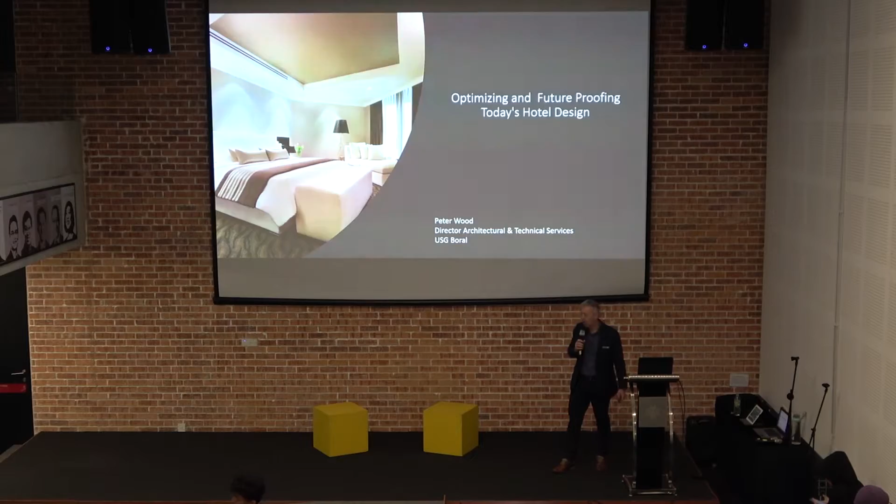So the talk we're going to give today is just on hotels, and we've been doing a lot of work in the region over the last couple of years in hotel design in Southeast Asia. There's been a massive spike in the number of 4- and 5-star hotels being constructed, and we particularly see that around Vietnam, Indonesia and Malaysia as well. And with that, it's becoming more and more of a requirement for our customers and guests to have a good experience.

So everyone these days has a smartphone. Everyone is a critic and everyone is a reviewer. And I know myself personally, when I'm looking at a hotel or where I'm going to go on holiday, the first thing I check and my wife checks is the star ratings and the reviews in TripAdvisor and Booking.com. So the guest experience is probably even more important these days than it has been in the past.

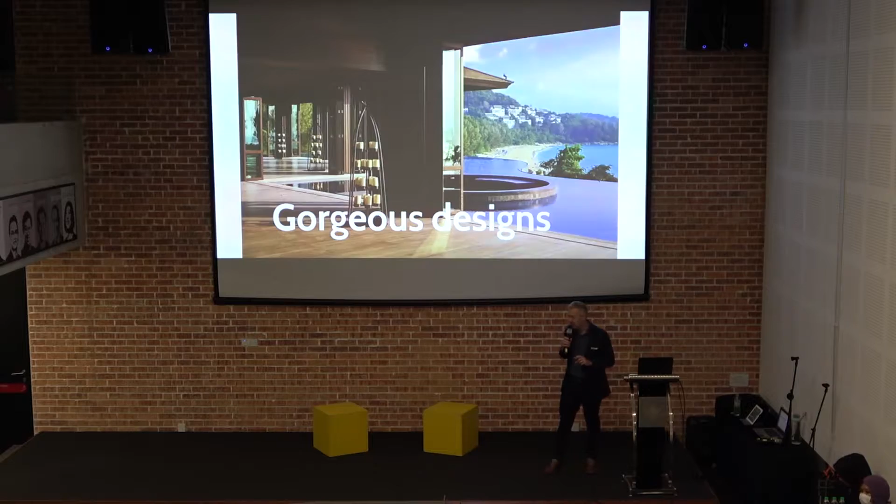So there's a lot of attention from an interior design and architectural point, getting the finishes, the look and the experience of these hotels to be perfect. So beautiful rooms, a lot of time spent on material selections, color palettes, the overall experience and the look. But sometimes we do see, when we work on these projects, something being missed. And if we look at social media, what we quite often see is complaints about the acoustics, hearing through the walls, hearing people in the rooms next door, the soundproofing not being designed that well.

And also even getting into connectivity these days, so Wi-Fi, poor connection. So what we're going to talk through is how do we improve, or what are the different ways to look at acoustics? There's thermal, there is Wi-Fi propagation, which is becoming a big thing these days, especially with internet speeds increasing, and productivity and the speed of construction. So those are the topics I'm going to cover.

So when we talk about acoustics, we're talking about sound. There's all different types of sound and acoustics. We've got external sounds: traffic, aircraft, people's general activities. Actually, just last week we had a trip to India for a couple of big projects there, and the hotel I was staying in was a 5-star hotel in Delhi. I don't know who's been to India, but they love their horns while they're driving, and there was so much road noise coming in through the windows and the external facade of that hotel. So external noise can be a big factor, but also the internal noise within that space, people doing different activities.

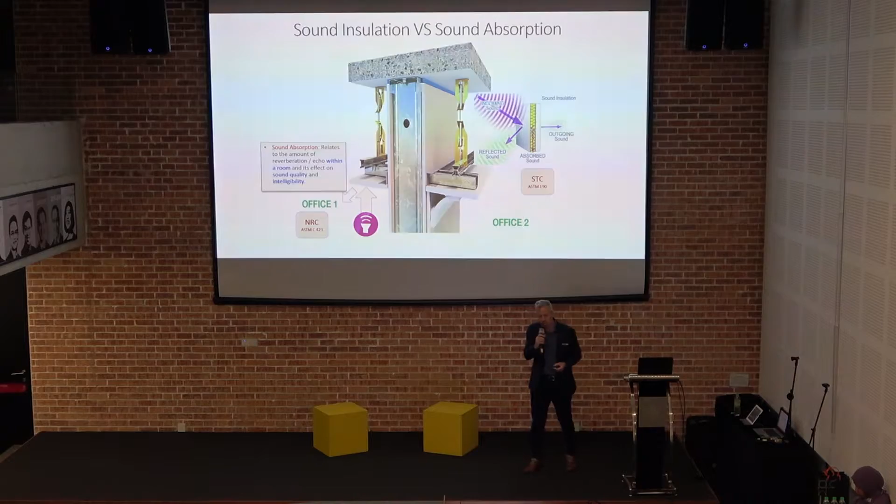The other part of sound we're looking at is absorption. This is where we're talking more about reverberation, reducing the amount of echo and reverberation happening within a space. When we look at that, we test for absorption, we talk about NRC, or noise reduction coefficient, so how much sound will be absorbed. For partitions and sound insulation, we're generally talking STC, and that can change between countries depending on what standard they're using. In Australia or New Zealand we use Rw, which is a weighted index, while through Asia and North America, STC is our main measure.

In the first part, the lower frequencies, the stiffness of the material is what affects how much sound's going to go through. Then we get to the resonance, which is any echo within the space. And then we get to Mass law. So Mass law basically says that you need to double the mass to get a 6 dB improvement. And that's your mid-range frequencies.

And when we get up to the higher frequencies, we get what they call the coincidence region. What that is, everything has a natural harmonic. And what you find is at a set frequency, the harmonic of the wall material will match that frequency, and sound will pass through.

So if we're looking at traditional construction, say masonry, brick, or AAC, which is quite common these days, really the only thing to play with is that mass, right? So what we can really do is increase the mass. Mass law tells us you need to double the mass to get a 6 dB improvement. So what you end up with is thicker and thicker walls. The other thing you can do is create an air cavity and have a double skin masonry wall, but there are still limitations.

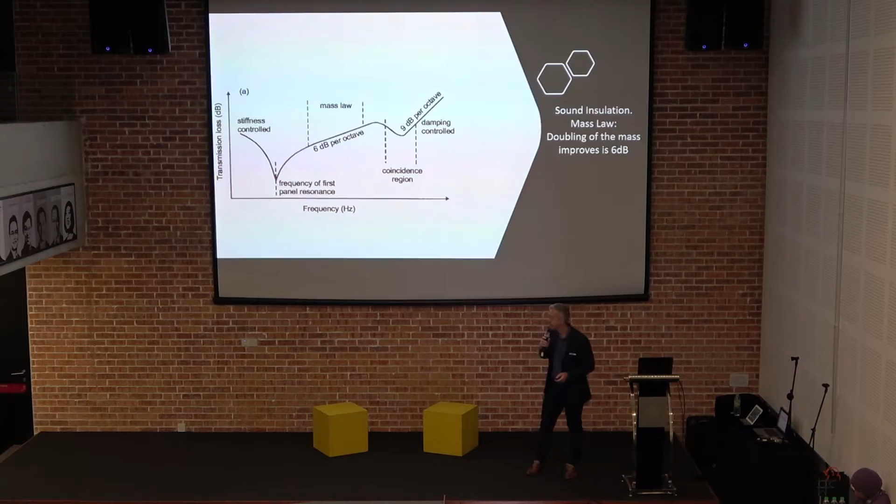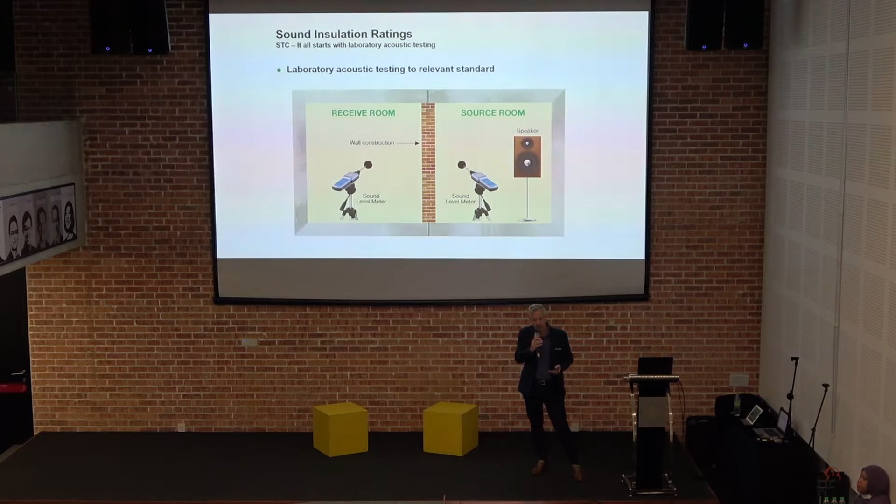So from a technical point of view, how do we measure this? This is all measured in a lab. We do a test to an ISO standard. The ISO standard sets the room configuration, and the test method is an ASTM for STC. And generally what you would find is the actual test result will be different than what you measure on site. So generally there'd be a 5 decibel reduction for what actually happens on site compared to what we test in the lab.

So you might have a situation where there's a lot of low frequency noise, and we see that in residential construction. Everyone these days has a home theatre system, subwoofers and low frequency noise producers in their space. So that's always a consideration, especially in residential construction, to have that wall also designed to help reduce low frequency sound. So STC 55 is going to give us good control, but it actually will not do very much for that low frequency noise.

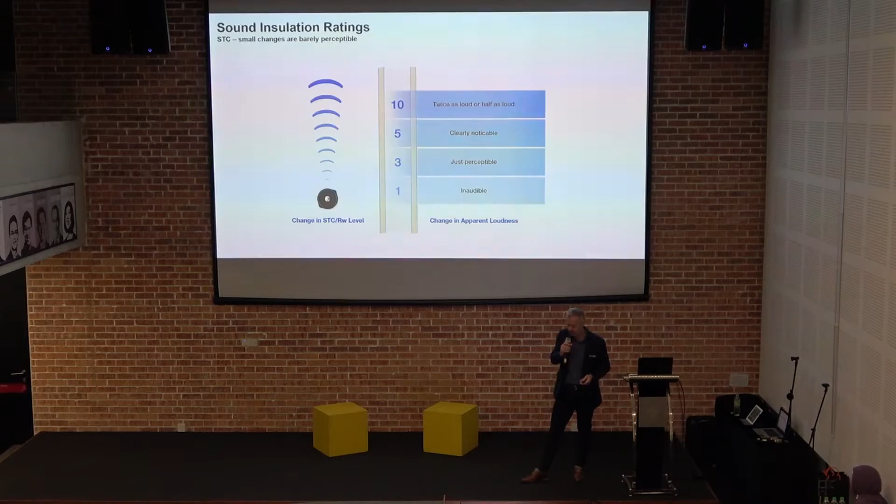And a 1 dB change is really inaudible. You could pick it up on a frequency change, but from an environment, if you're getting a 1 or 2 dB change, the human ear can barely pick that up. So really, 3 dB and above is where you really start getting an effect. And when you get to 10, you're actually doubling the effect.

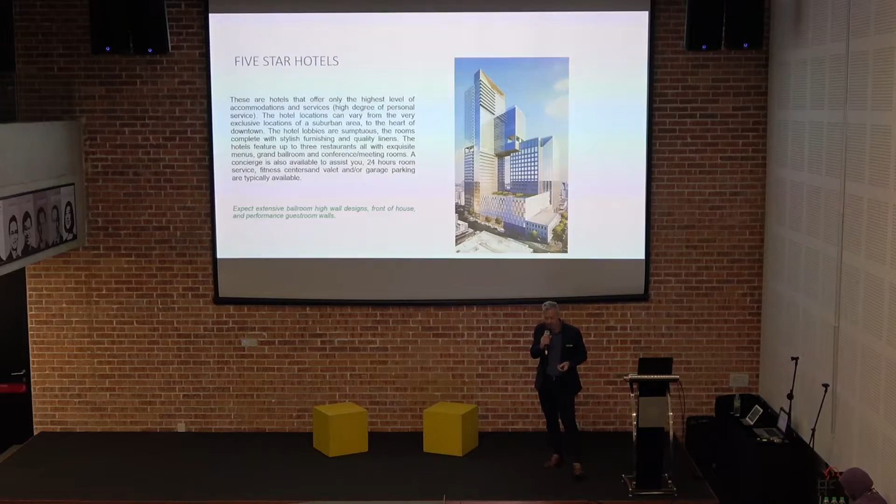So when we talk about hotel construction, we're really looking at 5-star, 4-star, and 3-star hotels. And in some markets we've still got 2-star hotels as well. And in there, particularly international hotels, what we see is they have very set specifications on the hotel performance, on the finishes, the standards for that hotel. But generally, they will also have very set standards on the acoustic performance, the room-to-room, room-to-corridor, into the service shafts as well.

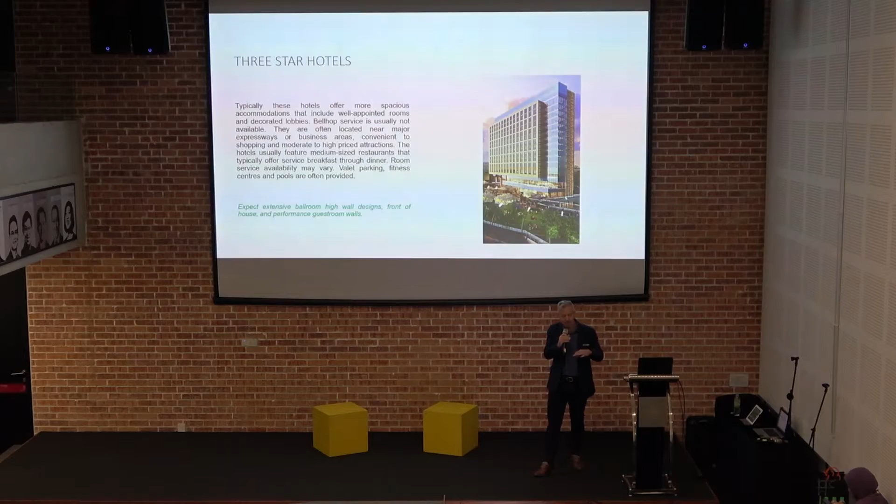But what we are seeing more and more is that because of the customer experience and things like Booking.com and TripAdvisor, even 3-star hotels are adopting 4 or 5-star hotel acoustic standards. Because really that guest experience is important for business.

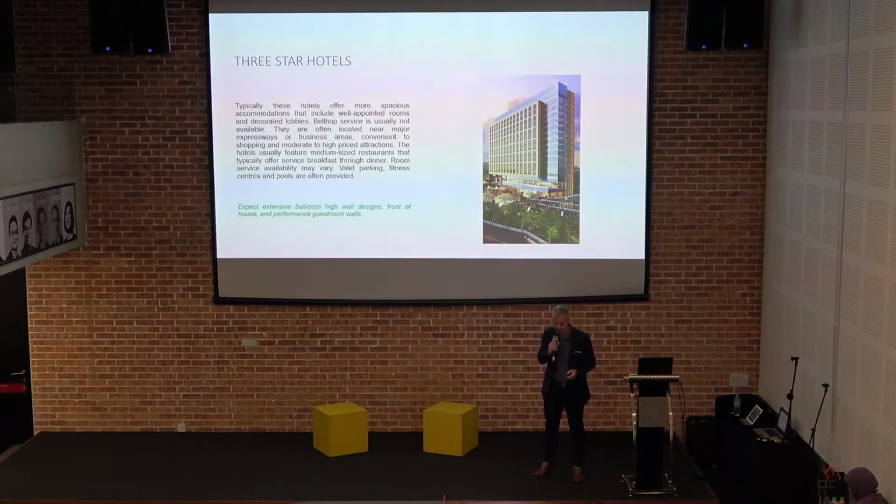So if we look at a common requirement for a 4 or 5-star hotel, the room-to-room walls generally are an STC 55. If we're looking at walls between a room and a corridor, we're looking at STC 50. And service shafts are sitting around 50 or 55, 56 sometimes on hotel standards as well. So Marriott, Hilton, Accor Group as well, they all have very set standards for acoustics within their space.

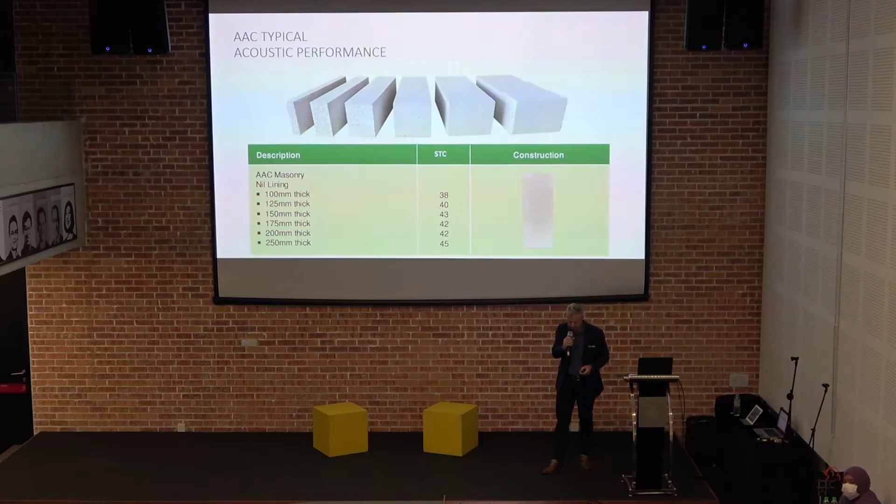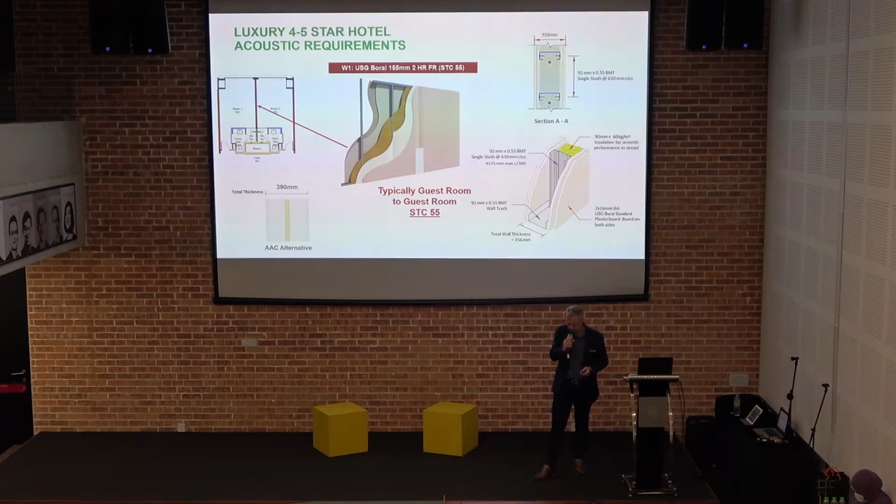And we can do that because we've got different materials, we've got a cavity gap, we've got insulation. Mass law works for the linings, but we're working in these different areas of acoustics and using the material science to improve the STC without just relying on mass. So you can see there a similar system, a masonry system, would be 390 mil thick. And for the STC 50 wall, the room to corridor, we're down to 126.

So we're actually always working to try to reduce that wall thickness. And we've got a couple projects that have been running now for probably a good 12 to 18 months to really try to reduce this wall thickness, particularly on an STC 55. And various things our material science guys are working on to try to reduce that. So that's an area that's always in development, and we're always trying to reduce down the mass, reduce down the overall weight of the wall and the width, but maintain the performance.

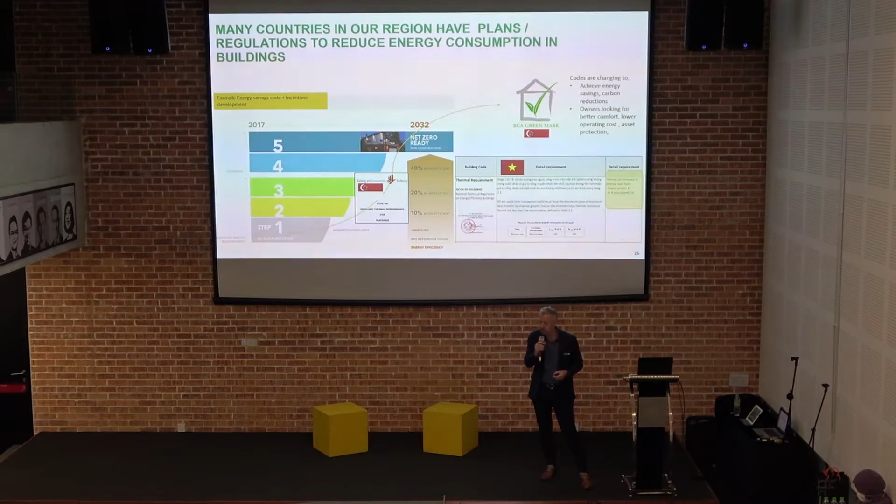The other area to consider for hotels with traditional construction versus other materials is energy efficiency. So what we see in the region is new laws coming through dictating energy efficiencies for buildings. So Singapore's got a plan to 2032 to dramatically reduce their energy consumption and efficiencies of buildings. We also see that coming through in Vietnam as well, and also into Thailand. We've seen that pretty significantly in Thailand, particularly in hotel construction.

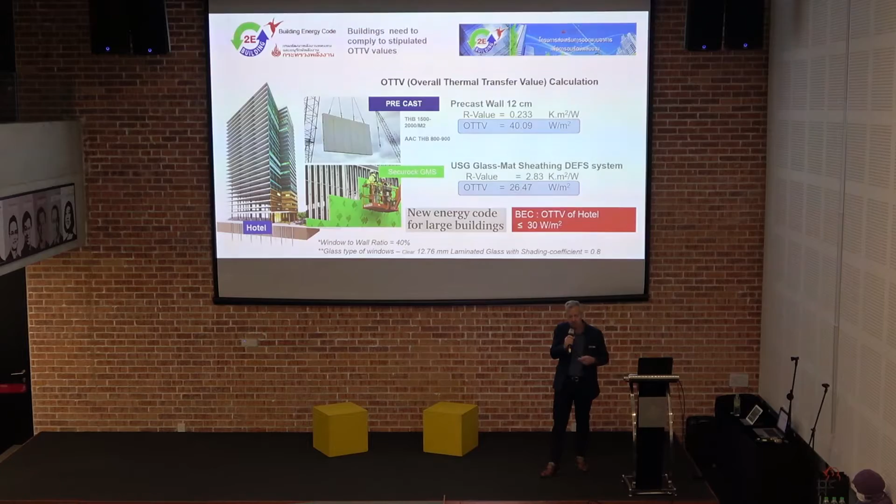So what we're seeing in Thailand now is they've actually set a maximum overall thermal transfer value, so the amount of heat transfer through the building, the OTTV, at 30 watts per metre square. So if you look at a precast wall, that's giving generally a 40.09 watts per metre square, compared to a cavity wall system for external use, which is down to 26.4.

And again, just from a personal experience, originally I was from New Zealand and then lived in Melbourne for 17 years before coming to KL. So quite a climate change, right, from the southern part of the world to the equator. And very warm, very humid here. But actually, I did personally notice quite a difference in the amount of heat that comes into our home compared to what I was experiencing before.

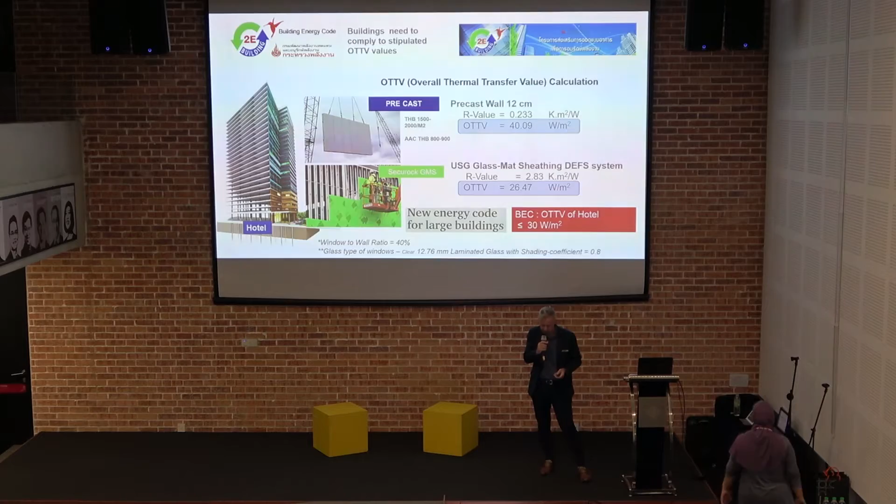So we're running our air conditioning all the time to control that climate. And if you put that into a commercial premises, the cost of that just escalates. So this is why we're seeing in the regions more and more code change coming through to try to improve energy efficiency in buildings. And masonry generally is not great; it's a good heat sink, but it's actually something that would absorb heat and then release it as well.

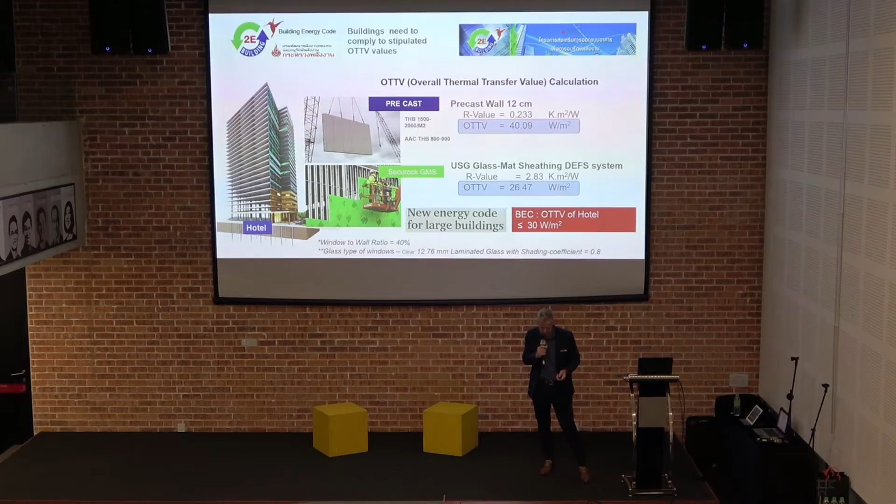The other area that we've been working in and getting involved in, and we see becoming more and more of a requirement, is Wi-Fi propagation. So I've got, again, a personal experience. I have teenage children, and if we go to hotels, we go on a holiday, or even in our own home, the thing that our kids are most interested in is connectivity, right? The first thing they do is they look at their phone and what signal do I have in this space, right? They're not interested in anything else. They just forget about the beautiful beach outside.

Can I get on the Snapchat?

So we find that Wi-Fi propagation is becoming a thing. In hotels, we actually see that now flowing through as a standard for Wi-Fi propagation: an actual signal strength minimum that they want for any public open space. And the signal strength for Wi-Fi is measured in decibels, the same as it is for sound. Because Wi-Fi is just the same as sound, just the same as light. It all moves and propagates on a wave.

So what they measure is the Wi-Fi strength as a decibel number. We are seeing more and more standards coming through for this. And so we got involved in some testing of this. We got involved with a company called Ruckus, which is a US company that specializes in this area, but they have a pretty big office in Bangkok. So we worked with them there and looked at different materials.

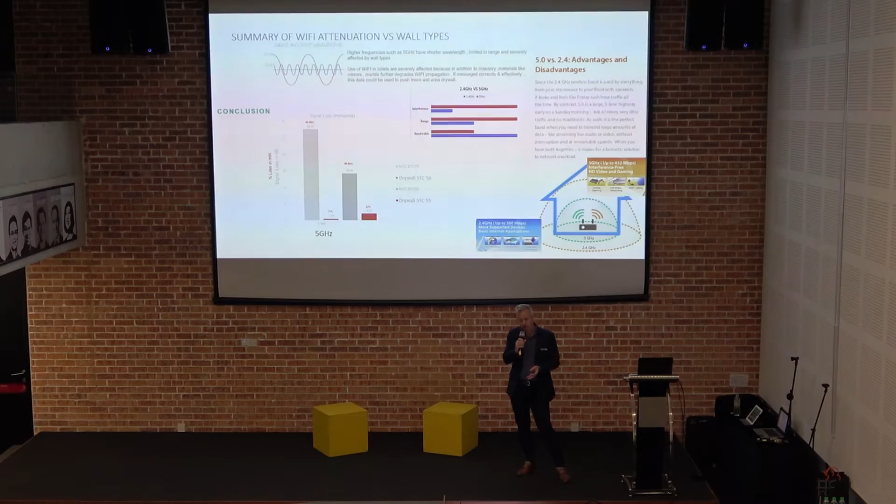And with Wi-Fi, what we see these days is generally two types of frequencies, so 2.4 gigahertz and 5 gigahertz routers. And the higher the frequency you go, the more material would start to interfere with that signal. So if you think about it, we're back to acoustics and STC, in that for wall performance we measure from 125 hertz to 4,000 hertz. When we're talking Wi-Fi, we're getting up to gigahertz.

So a hertz is one wave per second. So when we're talking 4,000 hertz, we're talking about 4,000 waves in 1 second. Then we go kilohertz, we go megahertz, and we go gigahertz, where we're talking billions. So the good thing about Wi-Fi is that means we can transmit a lot of information very fast.

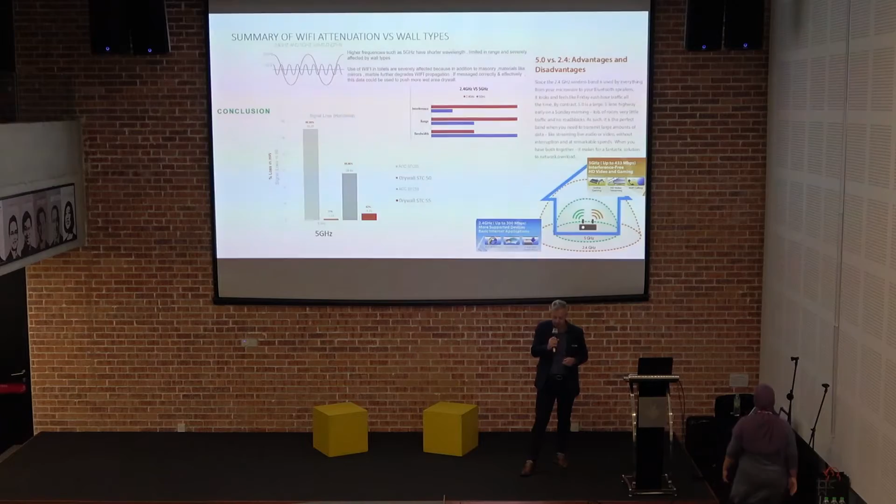I'm not too sure if that's me or not.

So when you're getting into that sort of speed, when you're going up to 5 gigahertz on a wavelength, material starts to perform very differently than it does in, say, the lower frequency range for acoustics. And what we find is that on the left-hand side of the graph, that's a masonry AAC block. It blocked 99.99% of that 5 gigahertz signal, where a cavity wall system was sitting at around about 50 to 62%, depending on the STC of the wall.

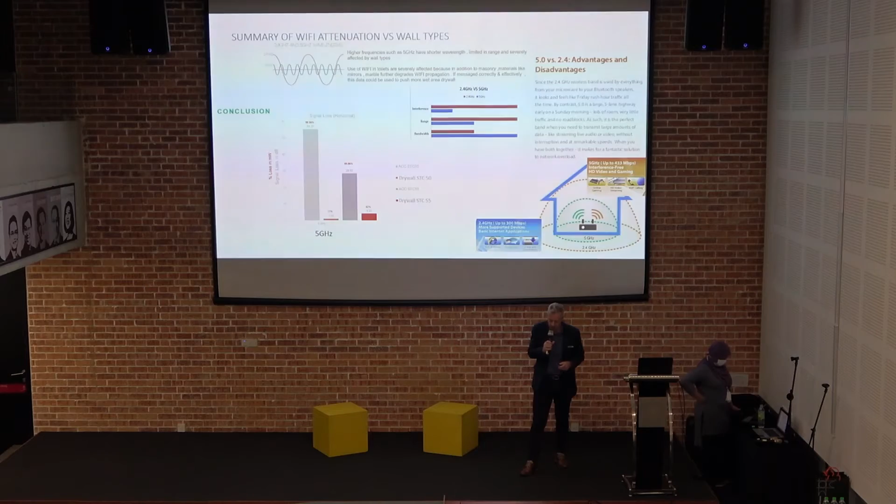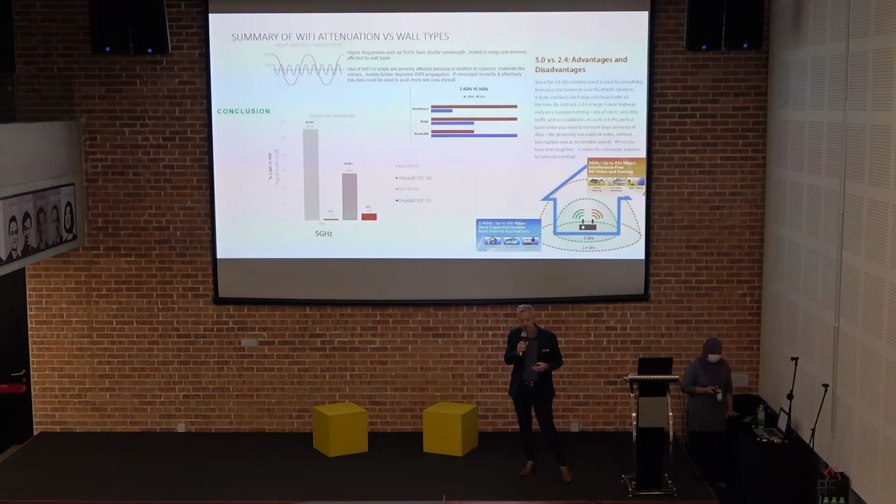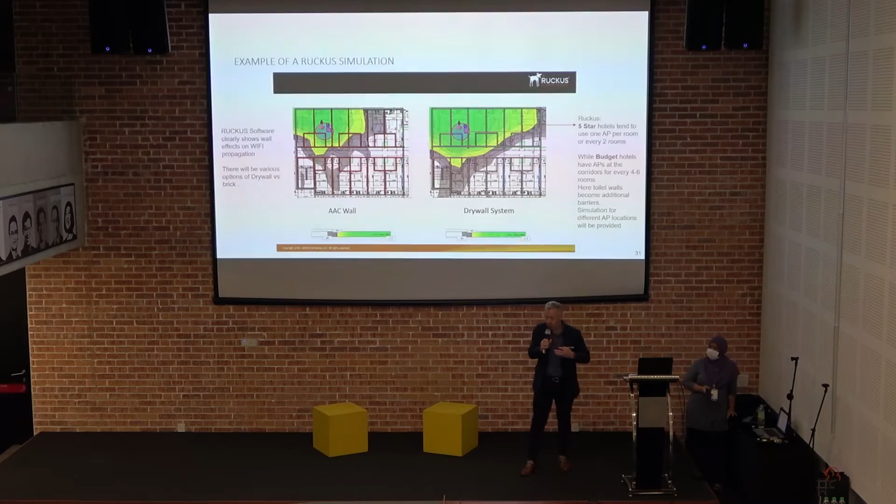So for an STC 50 wall, masonry is 99, where a drywall is 50. If we get to a 55, that drywall is blocking about 62%. But again, the difference is quite significant. So what we see as a footprint, again, these are simulations that Ruckus did. If you have one router in a room, you can see on the left-hand side there, with AAC, the signal strength is relatively limited and drops off pretty fast. Whereas if we have a cavity wall system, a drywall system, we're getting much better coverage.

And if we look at that from a hallway perspective, generally, especially in 2, 3 or 4-star hotels, the routers are put into the hallways, and what you end up with, if you've got traditional construction, is a lot of blind spots. And people are expecting to get Wi-Fi in any part of their room. So whether they're lying on the bed, sitting at the table, sitting on the toilet, everyone wants to be able to get Wi-Fi, no matter where they are in that space.

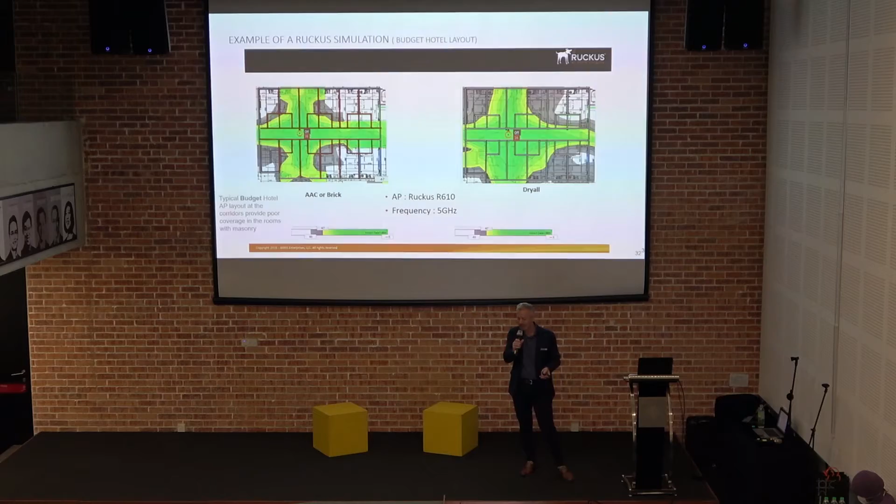So using different materials can really affect that. And it does future-proof that building as well to a degree, because speeds are just going to get faster on the internet. We've got 5G, or fifth generation, coming through. We're going to rely on that for the Internet of Things. Everything's going to be connected. So when we get into that space, material selection and how materials work is, I think, an area we're going to see growing in regard to testing and people's knowledge.

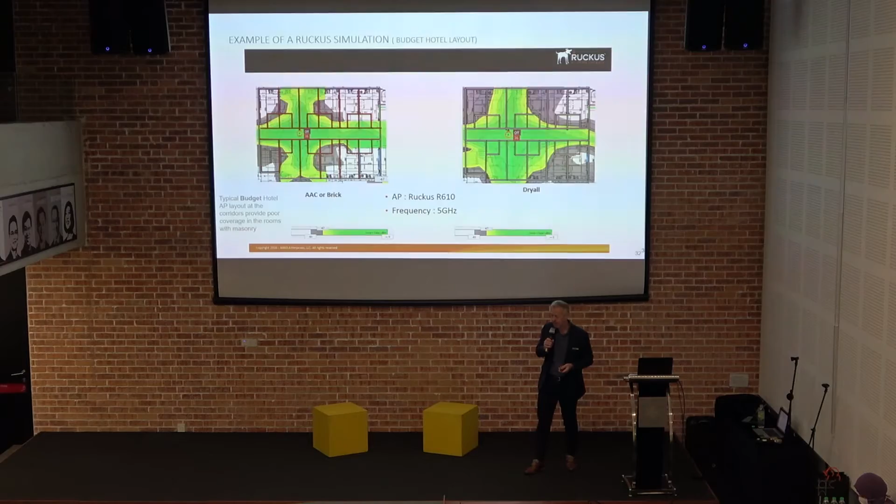So the other area we look at for hotel construction is productivity, so speed of construction. Hotel operators want to be able to open as quick as they can. It's a commercial operation. The longer they're in construction, the less time there is revenue coming in. But also, for a hotel, every 7 years they're refitting and redoing a room. So you're also looking at productivity and flexibility down the path to be able to modify that hotel or redesign it.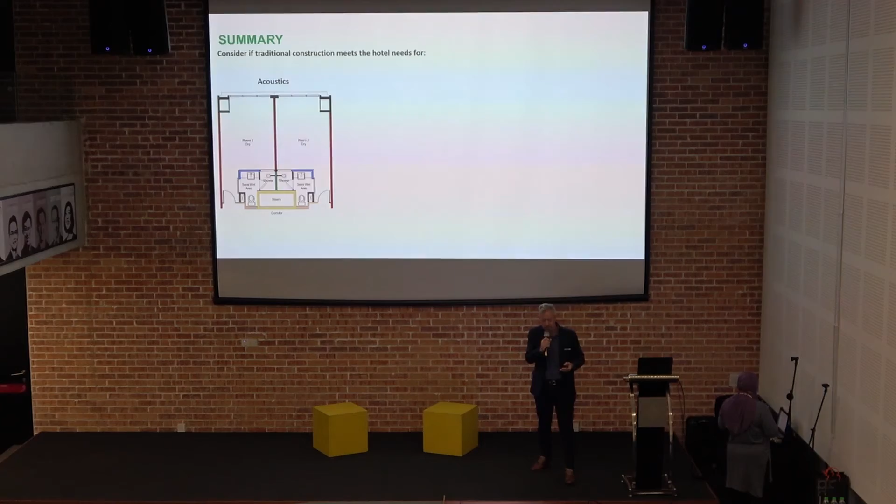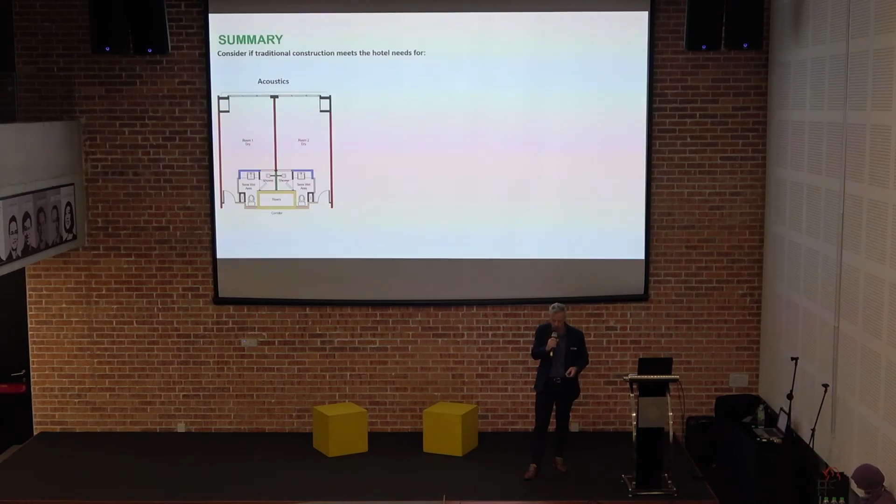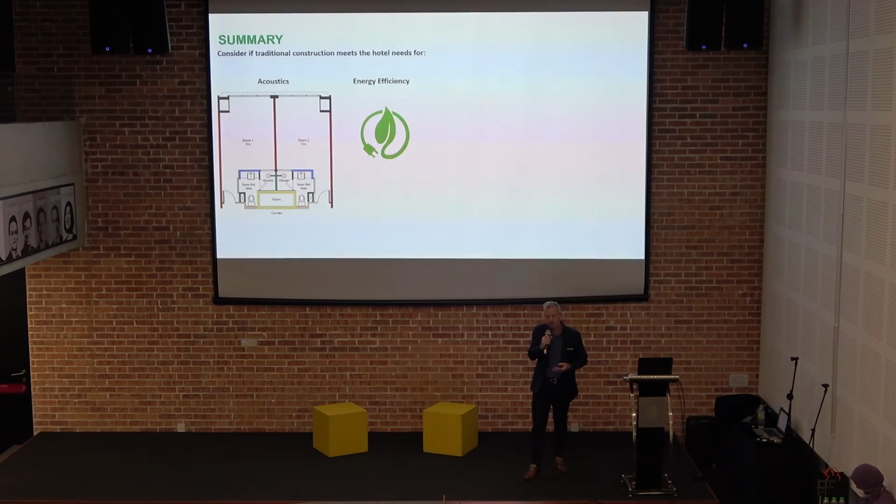So when we're looking at hotels, really the things to consider, just in summary, is think about the acoustics. Think about the acoustics between different applications, so room to room, the wet area applications, the service shafts is a big one, the corridors and the external walls as well, your curtain walls. Think about the energy efficiency, right? So what's the cost going to be to the operator of that hotel? It doesn't just apply to hotels. It could be a residential condo as well, or it could be an office building. What's the overall thermal performance of that building? And is that material selection and system going to improve it?

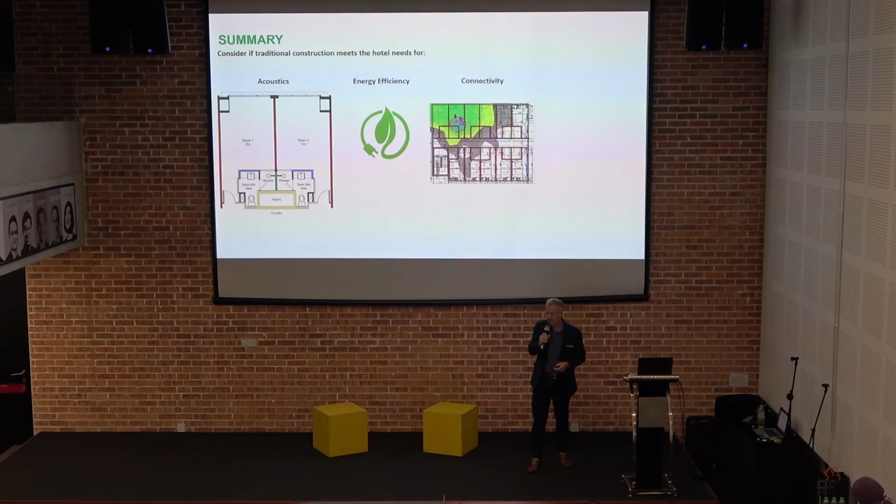Connectivity: what's the connectivity or the use of the space going to be, coming into the age that we're in, where everything is connected by the internet, and we're relying more and more on connectivity. Again, from a personal experience, everything that my family does relies on the internet. Our TV, we don't watch free-to-air TV. We stream our TV with Netflix and Amazon and different services. All our music comes through from Spotify or online radio stations. Everything we would traditionally have done another way from an entertainment perspective. I've seen the transformation of my family, with teenage kids, and we operate in a completely different way than we did just 10 years ago.